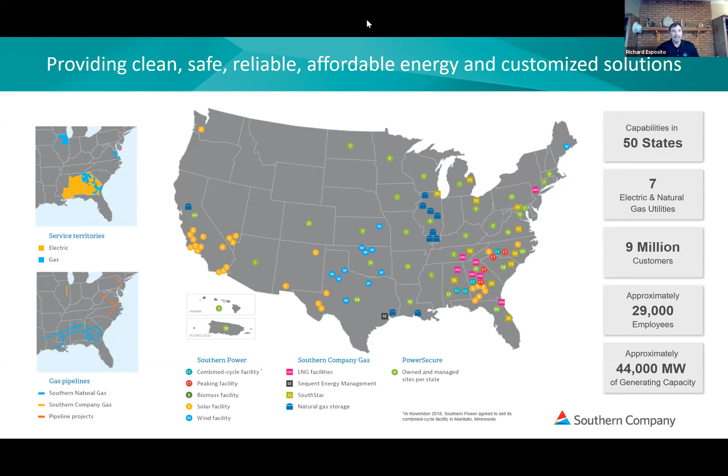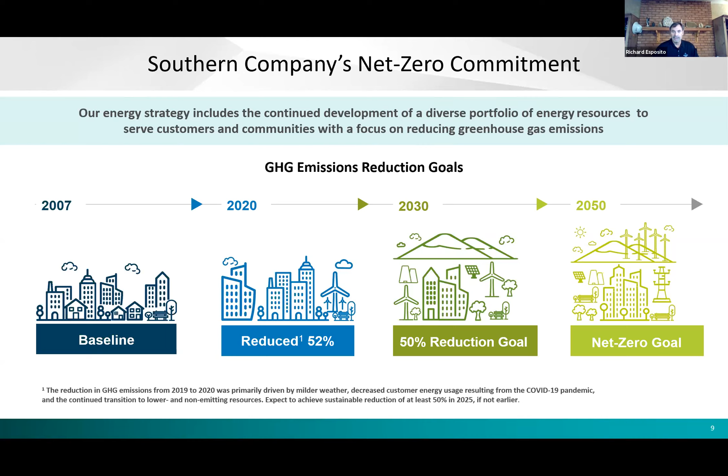We have greenhouse gas goals established, like most electrical utilities. We have net zero established for 2050, 50% reduction goals by 2030, which we've already actually met. But I will have to be honest and say we haven't really met that with a lot of technology. It's mostly been as a result of fuel switching from coal to natural gas. As we shut down coal plants and repower with natural gas, that's 65% less CO2 emissions. So we're really making some huge strides right now with fuel switching. But we do recognize that at some point we will have to start deploying technology on our fossil assets, and that's where CCS will come into play. Next slide.

So look, a few beliefs about the future. We do believe that CCUS is critical to our future, and we have to make it affordable to our customers. And also the interesting thing about CCS is it does blend well with other technologies like hydrogen. Emily talked about hydrogen and bioenergy CCS. So the infrastructure, the storage, infrastructure for transportation, all blends very well with that. So CCS kind of works across the board.

But we do recognize that it will be a very diverse portfolio of negative carbon emissions for us to meet those 2050 goals. We're very bullish on Class 6 UIC, nothing against enhanced oil recovery. We've just seen some issues with the NRG Parish Station facility with the price of oil and up at Boundary Dam. So we really are very, very interested in Class 6 UIC permitting.

And then again, the widespread deployment of CCS is going to take continued R&D investment, and that's why we're glad that we have our partners with the Department of Energy. It's going to take a lot of infrastructure. We've got the infrastructure bill sitting in DC right now, trying to figure out what's going to happen with that. But I think that's going to be very important. But it's also a three-leg stool of policy, technology, and permitting that'll all play a critical role in the technology moving forward. Next slide.

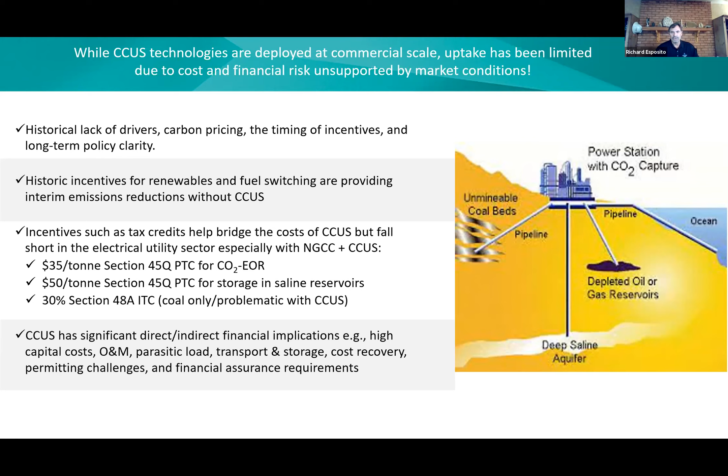So if you look at carbon capture technology challenges right now, if you're down in the range of purity of CO2 from a process or a power plant, you've got ammonia, natural gas, ethanol, which is relatively pure CO2 coming out. Most of what's going on there is you've got some dehydration, some compression, you've got to transport it, you've got to store it. So those processes, when it comes to carbon capture, are a little more straightforward. When you get into cement and steel, which is kind of that middle of the road CO2 concentrations and emissions, you start having some more difficulties.

But when you get into coal and gas, and especially with direct air capture, you're dealing with a lot smaller purities of CO2 in the flue gas or in the emissions. And so that's when the big costs start coming in, and then you have issues. In the industrial sector, there's heat integration issues. You've got multiple sources, like up at a petroleum refinery, you might have quite a bit of CO2 coming off, but it might be a bunch of multiple sources of different purities that you might have to deal with.

And then in the power generation, you have load following and dispatch issues with ramping up and down in the carbon capture equipment. And then of course, with natural gas, you've got the increased oxidative degradation with natural gas, as well as the higher O2 percentages, and then the lower concentration of CO2 in the flue gas for natural gas.

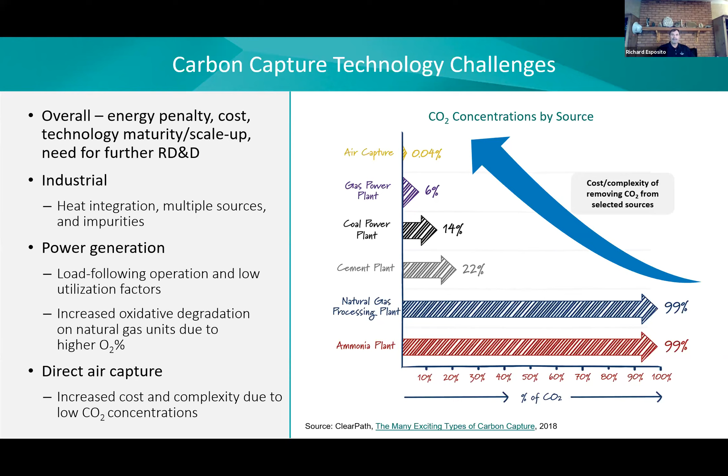Because keep in mind, in the electrical utility industry, we could choose to build nuclear, we could choose to do all renewables with energy storage, we could choose to do green hydrogen or blue hydrogen, and we could avoid CCS. But if we can get the costs down low enough, then it really makes it a very viable option moving forward. And I think one of the biggest importance here is this FOAK to NOAK to NOAK, the first of a kind, the next of a kind, the nth of a kind.

So beyond getting different technologies moving forward in this queue of technologies for diversity of technologies available, it's also moving them into the pilot, and then into the demonstration phase, and then next generation demonstration phase. So for example, Boundary Dam, when they did that project, they're saying that if they were to do this project at Shand, which is their other power plant up in Saskatchewan, they might realize 30 to 40% cost reductions, which is just really staggering, and that's amazing.

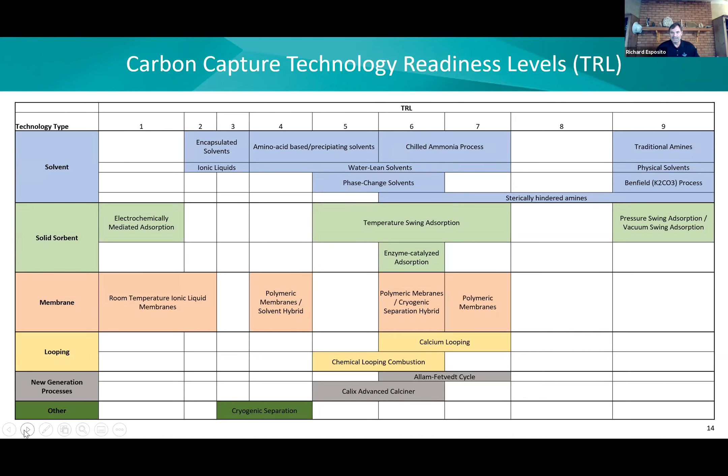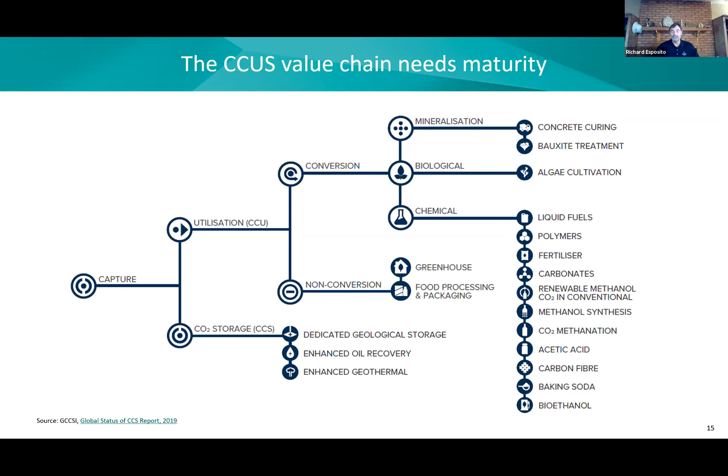Next slide, please. So also the value chain needs maturity. For large volumes of CO2, we're down there in that CO2 storage, dedicated geological storage, enhanced oil recovery. But Emily pointed out a lot of opportunities in the utilization part up there. And some of those are mature processes that have already been going on, but some of them are not. And so those things need to mature. And that's, I think, probably the essence of a lot of the utilization program that the Department of Energy has now and that a lot of industries are looking at. Next slide.

But the most important thing about this facility is that, for the most part, there's very little to no cost to the technology vendors who get accepted to come in there and operate and test their technologies. The Department of Energy is funding this, and then there's an industry cost share, and it's sort of this opportunity for people to come and to have their technologies screened by an independent, agnostic, third party who's looking at these technologies with a very open mind.

I mean, just because Southern Company operates this facility, we're not picking winning horses. All we're doing is helping technologies move, because any technology that moves forward that helps the industry as a whole is going to help us. Next slide.

And so we've had lots of hours of operations, lots of technologies tested. We've got an expert staff of capture engineers there, probably the largest grouping of people who know the most about carbon capture in the world. And also very exciting, we just recently built a natural gas boiler. So we're actually testing carbon capture technologies with real natural gas flue gas, instead of just diluting the flue gas that we were getting from the coal plant that was right next door.

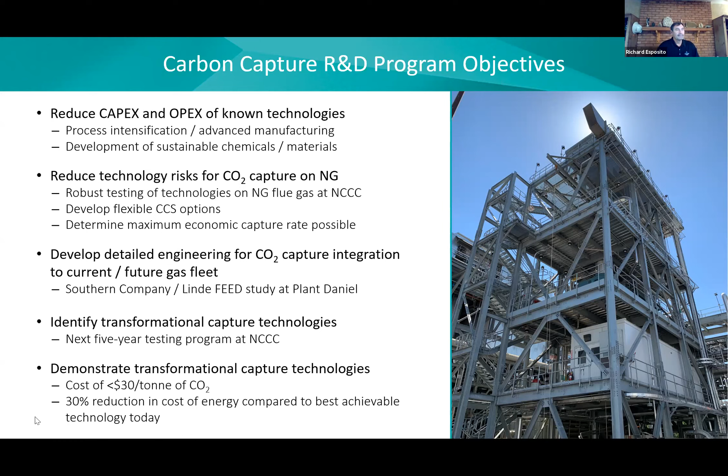And then we're also demonstrating and identifying transformational capture technologies, these up and coming technologies that haven't gotten a lot of attention in the past, like sorbents and membranes and zeolites, because a lot of people have really just focused on commercial deployment of the amines. Next slide. And of course, we've got absorption that we're looking at, adsorption, membranes, cryogenics is another very promising technology. And fundamentally, a lot of these technologies are very consistent both on coal and natural gas. Next slide.

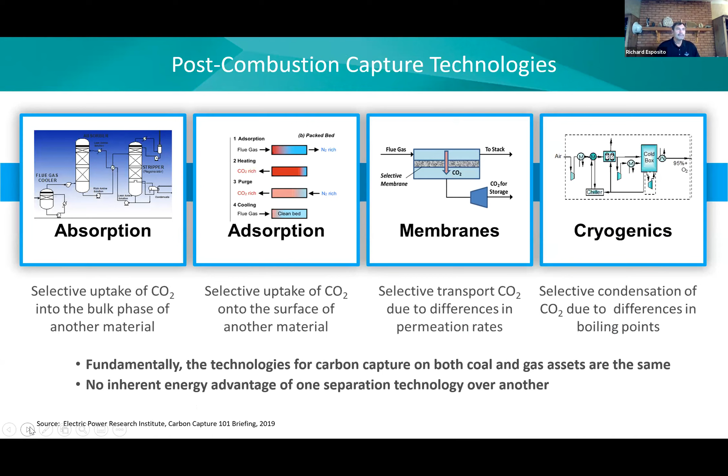So if you look at this, everything we've done to date, cooperatively with the Department of Energy or individually or the industry as a whole, everything we've done on coal is not for naught if we shut down all the coal plants or if we start saying, okay, we need to capture on natural gas. There's a lot of very common issues. I won't go through all these, but you can see this slide and the slides will be available. There's a lot of common issues between capturing CO2 on coal flue gas as opposed to natural gas.

But there are a few uniquenesses of natural gas. The lower CO2 concentration is the big deal, higher oxygen content and higher flue gas temperatures. So understanding those intricacies on deploying the existing technologies like amines and other things that are coming down the queue on natural gas is very important. Next slide.

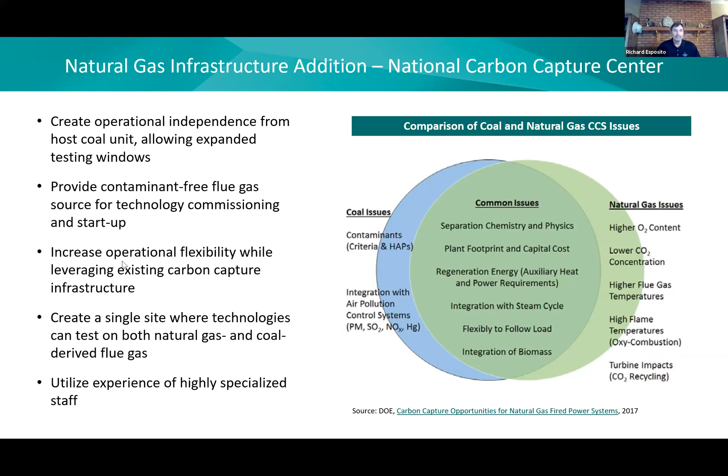And so the Department of Energy, again, I know I keep mentioning them, but they've got some great programs now. They've offered up some funding for FEED studies. And so Southern Company does have an award, and we're doing an effort where we're looking at a FEED study on capturing CO2 on natural gas.

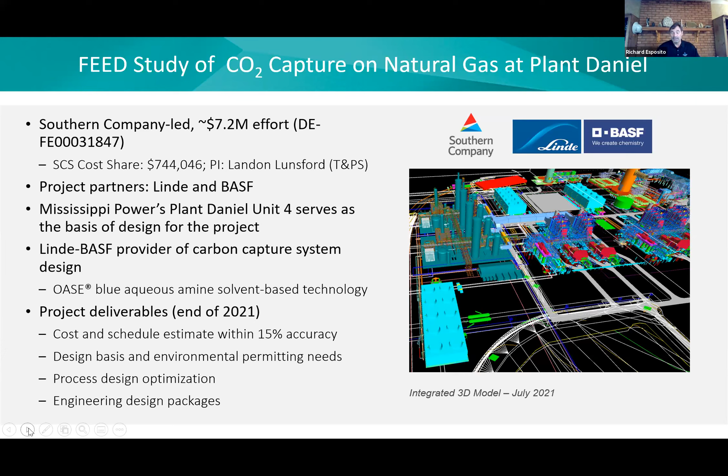And this is really important because what this is doing is taking technologies and basically evaluating what the capital cost would be. We're not doing O&M costs on this study, but looking at the capital cost of what it would cost to build carbon capture technology at this generation asset that we have in Mississippi, where we're doing this FEED study. And so this really informs our stakeholders for our RFP process and other processes on understanding the costs of carbon capture, especially in this case with natural gas. Next slide.

Infrastructure. The technology of building pipelines is there. Our good friends at Occidental Petroleum and Denbury would definitely agree with that. It's just the scale and the magnitude, and also where do we build these pipelines and how big will they be? And understanding source sink matching is really important.

And then thinking into the future about the hydrogen, the 111, that Emily mentioned. Talking about where would we build these pipelines? How is it going to further develop a network of CCS, both for the industry as a whole, but for other industries that might decide to decarbonize later on. Next slide.

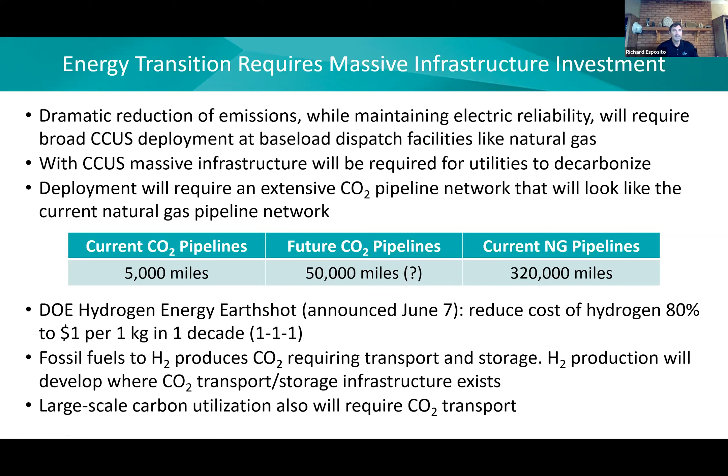And I know you guys are going to be talking about this a lot, so I'm not going to go into this, but there are pipeline issues with cost, property rights, and permitting, and there are some things in DC right now that are looking to try and streamline that. But the key thing here that I think everyone needs to realize is that when you start getting CO2 pipelines that are more than about 150 miles for source-sink matching related to storing CO2, you're getting into costs that are going to be paralleling some carbon capture costs for maybe a 700 megawatt gas-fired power plant.

And so that's tough on the shoulders of CCS, to be paying the capital costs of building a carbon capture plant and these large, long CO2 pipelines. And then again, the storage cost is probably pretty small compared to that, but it's a big deal. Next slide.

So Southern Company, I'm just really proud to announce that we've done so much site characterization. If you look at the slide on the left, we've drilled close to 20 wells across our system. We've injected CO2. We've built small pilot carbon capture plants. We pulled together a Class 5 UIC permit back when Class 5 was available. Now we're working on a Class 6 permit in our CarbonSAFE project. So we are surrounding ourselves with these issues, and we're really delving into this, especially the issue of source-sink matching. Next slide.

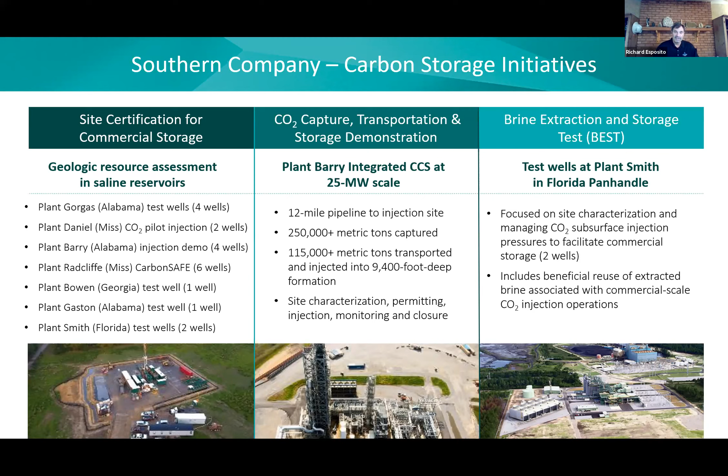And so on the storage side, I just really feel very confident about the storage technology. Understanding geomechanics and induced seismicity is still something I think we need to grapple with a little bit. I think we can always improve advanced reservoir modeling techniques; there's room for that. Monitoring, we have all the tools we need now to monitor CO2 in the ground. I would love to see some silver bullets come forward that really cross the T and dot the I on that. And then pressure maintenance and remediation: how do you manage sites where maybe you're getting some pressure buildup? I think those are some of the technical issues that are still outstanding.

But the whole process of just injecting CO2 into the ground and storing it long term, I think we're pretty much there on that. But early site certification is real important. It's been real important to Southern Company. These are a couple pictures of some of the sites where we've been drilling in our CarbonSAFE program. We've drilled 6 wells through phase 2 and phase 3.

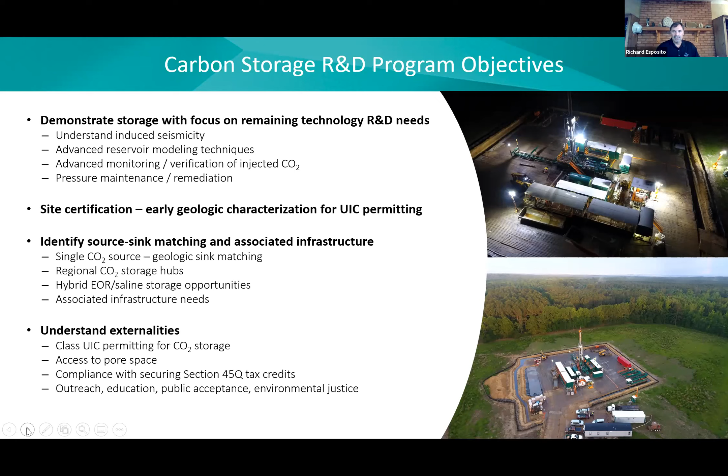But understanding whether we would do one-off source-sink matching and what kind of infrastructure is needed for that, or whether we'd be doing trunk pipelines and pooling multiple sources, those are the sort of things that we really need to be thinking about. And then all the externalities, which I know you guys are going to be talking about over the next couple of days: Class 6 permitting and primacy, access to pore space, and whether amalgamation is the way to go there, securing the 45Q tax credit, and then outreach and public acceptance, and now environmental justice is a big thing that we're definitely looking at. Next slide, and I'm almost done here.

So even as much source-sink, I'd be remiss as a geologist not to put a fancy map up on the screen. Even with all the wells that we've drilled in the Southeast and all the oil and gas wells that are in the Southeast, we still find ourselves in a situation where we understand a certain amount of our service territory where we could pretty positively do carbon storage. And then there are these areas where it would be impossible.

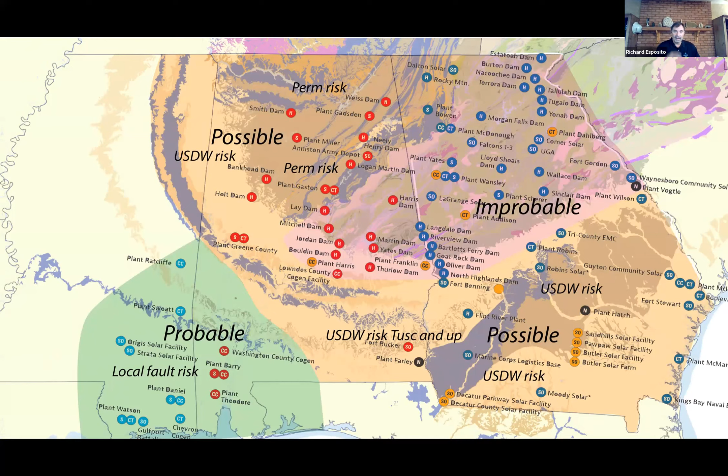That improbable area is the igneous and metamorphic rocks of the Piedmont, where there are igneous and metamorphic rocks at the surface and at depth, and you just can't do it there. So any power plants that we would have there, we'd have to pipeline it north or south. And then we're infill drilling and actually doing drilling on our own dime at Southern Company, looking at these areas where it's possible to do storage, but there's not a lot of information, in South Georgia or in North Central Alabama. Next slide.

And last slide, I don't have 2021, but the budgets have been really good. And I was excited to hear Emily say that the budgets next year are going to be even bigger. We'll hold her to that. But I think all in all, things are going well with DOE and their funding levels. We always want more funding, and we hope that phase 4 CarbonSAFE comes through, and there's lots of opportunities there. And with that, I am done. I think that's my last slide.

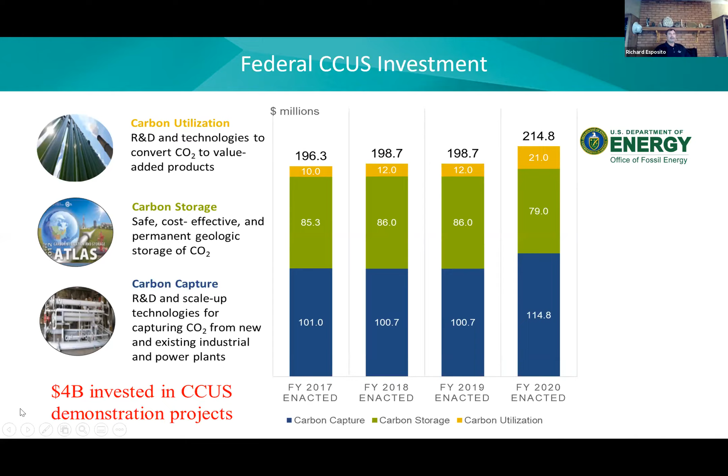Great, yeah. Thank you so much. This was a really great overview, and really appreciate walking through the technology and where we're at right now. We do have a few questions in the chat, so I'll get to them. One of them was, you mentioned the transportation pipeline issue, and I think your cost on one of the slides might have just represented capture. So how much more would transportation and sequestration mean in terms of cost? And then how does scale affect costs? And would you say that the economics suggest maybe aggregating multiple CO2 sources?

Yeah, there's obviously a benefit on economy of scale in building pipelines. I'm not a pipeline expert, but if you ask our good friends Occidental Petroleum and Denbury, they would say the major cost is the land and building the pipeline. The diameter is an additional cost, but it's not a significant additional cost. So a strategic vision is so important here, and that's so difficult in the electrical utility industry. What plants are going to be operating 5, 10, 15, 20, 25 years from now? Is that coal plant going to be shut down? Is that older natural gas plant going to be shut down?

So a strategic vision in generation planning and understanding what assets are going to be running and when we need to decarbonize those assets to reach our goals is so difficult. And we go through all these scenarios. And so I would say I'm real positive on regional storage hubs and pooling CO2 together from multiple sources, but you just have to be very guardedly optimistic that when you plan that all out and you spend the money for those pipelines, that those sources are really sources in the future, right?

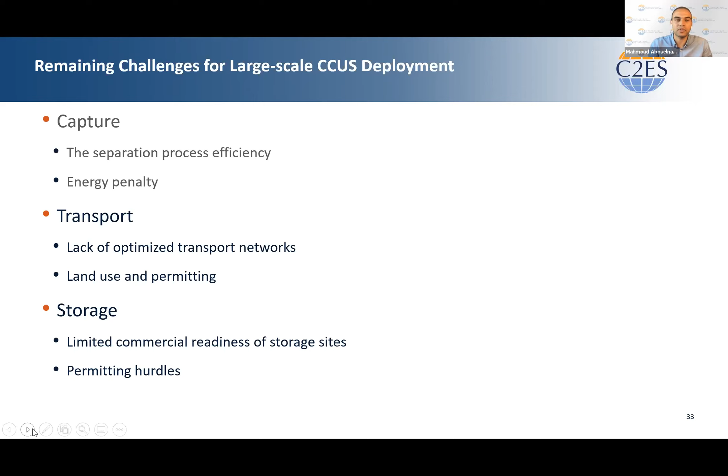Since industrial and power facilities tend to be concentrated in the same regions, these industrial hubs offer an opportunity for commercial synergies and economies of scale. And that's why investing in larger scale trunk pipelines can substantially reduce the overall cost by transporting large volumes of carbon dioxide from different emitting facilities to designated geological storage sites.

This research project estimated that more than 350 million tons of carbon dioxide can potentially be captured and stored each year by scaling and optimizing this regional infrastructure. This number, the 350 million tons, is actually more than a 15-fold increase in the current carbon capture rate that we have in the United States. So that gives you an idea how this kind of optimization can be a game changer for CCUS.

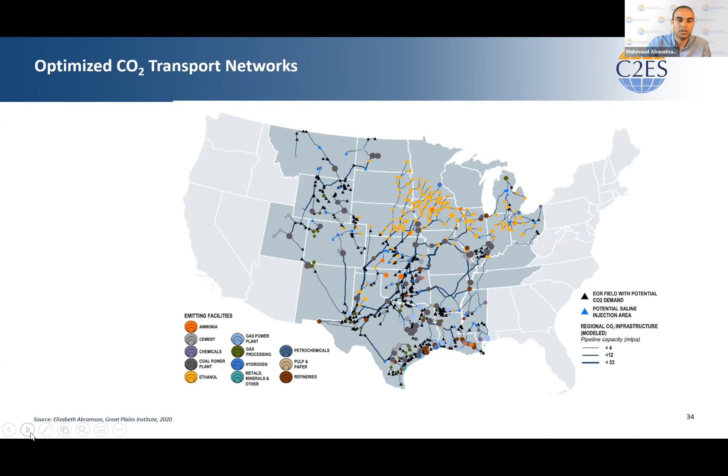These shared networks we are talking about take us to what is known as the hubs and cluster model. The concept basically separates capture from transport and storage infrastructure, and this allows some kind of risk sharing among different public and private organizations. And we have seen examples of this model. Actually, one of the projects that follows that model is in the center here.

For this project, the location is actually a big advantage because it's in the largest industrial region in the UK, which provides value by integrating the potential for both a decarbonized industrial hub and a hydrogen economy, which is an emerging economy that we have been talking about for some years now. And for sure, that brings us back to the idea of sector coupling. That's a big theme for decarbonization going forward.

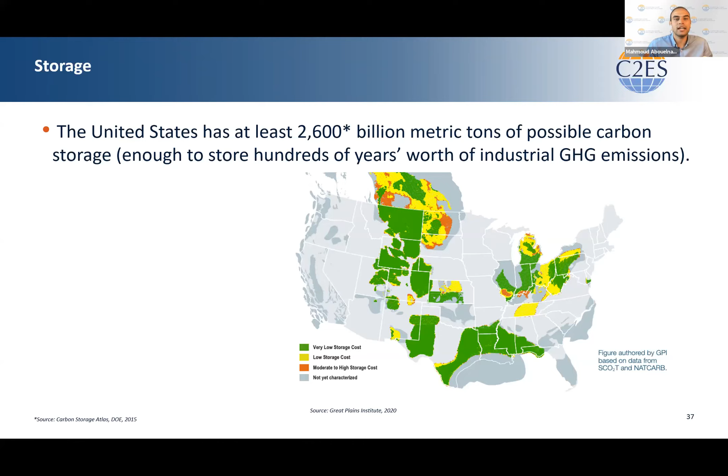Next slide, please. I just wanted to highlight the example of this particular project, the Illinois Basin Decatur project. It took approximately 4.5 years to receive a Class 1 permit, and then they needed to apply for a re-permit to make it Class 6 when the new category was introduced, and it has been the first well completely authorized under the Class 6 program from the EPA. And this process took nearly 5.5 years to complete before injection could even begin.

So that gives you an idea about how the current framework can jeopardize the timeline of any large-scale project, and that's something that we need to work on to allow more project developers to put in some of these large investments.

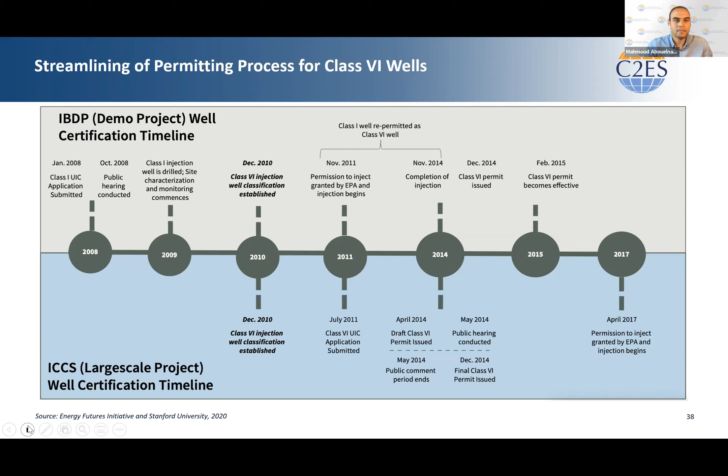Last slide, please. Finally, I want to highlight that CCUS technologies have a dual role in climate change mitigation. First and foremost, they can reduce emissions from energy-intensive industries and power generation. And second, they can be used for carbon removal from the atmosphere. While the capture part is different in emission reductions compared to removal, the transport and the storage parts are actually the same, which is why scaling this kind of infrastructure is essential for the development of carbon dioxide removal technologies.

As many of you may know, the recent assessment report of the IPCC has underscored the urgency to expand the use of carbon sinks to avoid the most drastic consequences of climate change. All mitigation pathways in that report use CDR technology to a certain extent, depending on how ambitious the scenario is. And you can see from the graph here the potential role of CCUS technologies in these different scenarios to both reduce emissions and remove carbon.

The National Academy of Sciences has reached the same conclusion, that 10 gigatons of CO2 need to be removed globally each year through 2050, and 20 gigatons each year need to be removed from 2050 till the end of the century. And that is why building a carbon infrastructure now is essential to allow time for this technology to scale up and reach the capture and removal levels that we need to achieve decarbonization by mid-century.

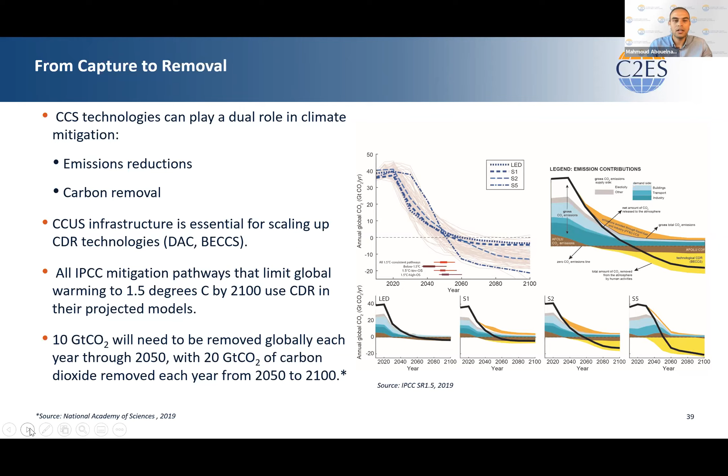Thanks so much. I'm Erin Burns, the Executive Director of Carbon180. Carbon180 is a climate NGO focused entirely on carbon removal, so really fantastic transition. I will talk mostly about direct air capture, the technological pathway. I want to share a little bit about what it is, where we are today, where we need to be, though Mahmoud covered that as well, and how we'll get there, as well as a few opportunities along the way. So I have a lot of slides as a heads up, but I'll be quick with them. They're mostly pictures.

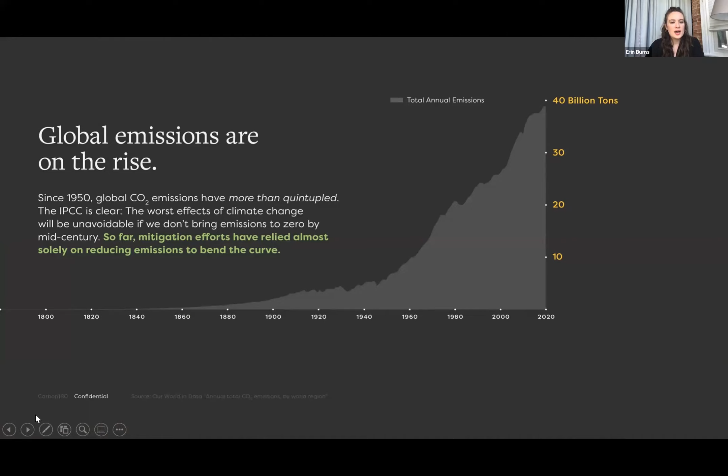Mahmoud covered much of this, but just as a note, we all know global emissions are on the rise. We need to stop emitting, but really that's not enough. Next slide. We need to also go negative, and we need to go really, really negative, and sooner than folks think. So we need to be talking about removing tens of billions of tons from the atmosphere, and we need to start doing that now.

Next slide. Luckily, we have lots of options to do that. There are natural pathways around soils and forests, and then more technological pathways, in particular direct air capture and bioenergy with CCS. We use the term carbon tech to talk about utilization outside of enhanced oil recovery. We don't really work on enhanced oil recovery. And so carbon tech is that captured CO2 to products piece.

Next slide. So where are we today with carbon removal? There's a ton of removal potential across solutions. And one of the really exciting things about direct air capture and bioenergy with CCS, the technological pathways, is that they can really, really scale. So if we're talking about 10 gigatons per year, they're going to play a really big role. But right now, next slide.

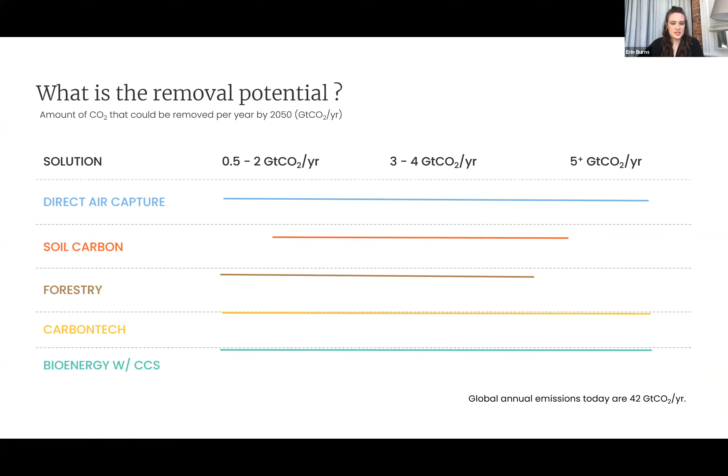I'm sorry, next slide. Oh, there we go.

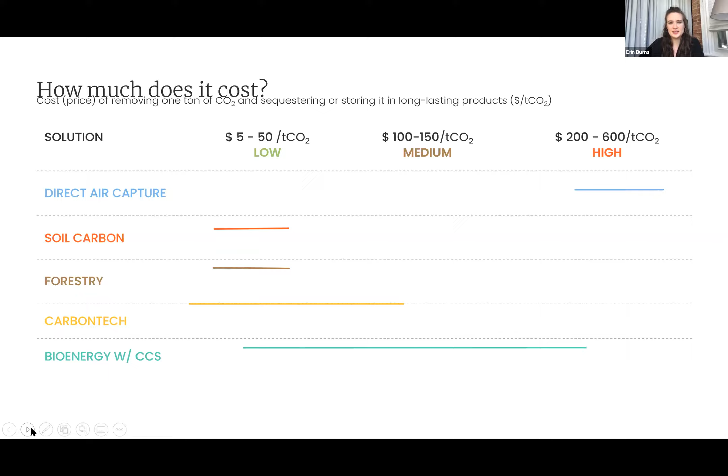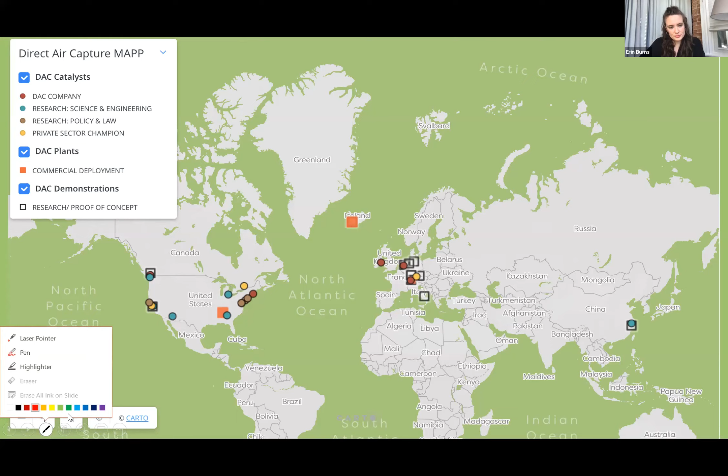But, oh, actually, well, we can skip to this one. It's fine. Oh, sorry.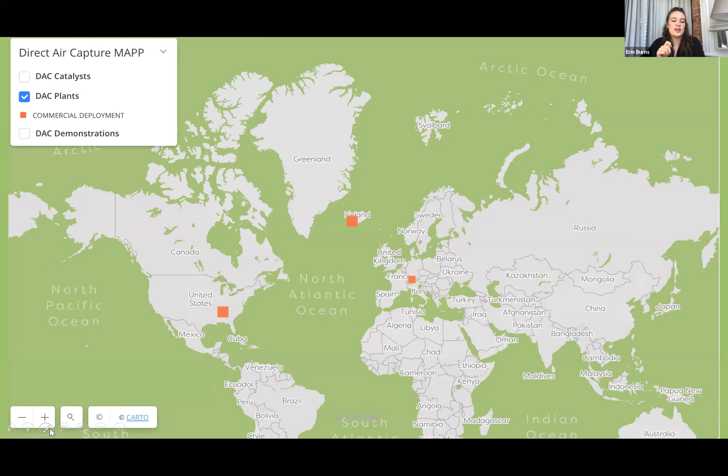But if you look at just actual direct air capture deployment, and commercial direct air capture deployment in particular, not including demonstrations, you'll see that that number really drops pretty rapidly. And next slide. But recently the largest direct air capture plant was launched in Iceland just this past month, the Orca plant from Climeworks, which also has a facility in Zurich, so is responsible for most of the commercial deployment right now.

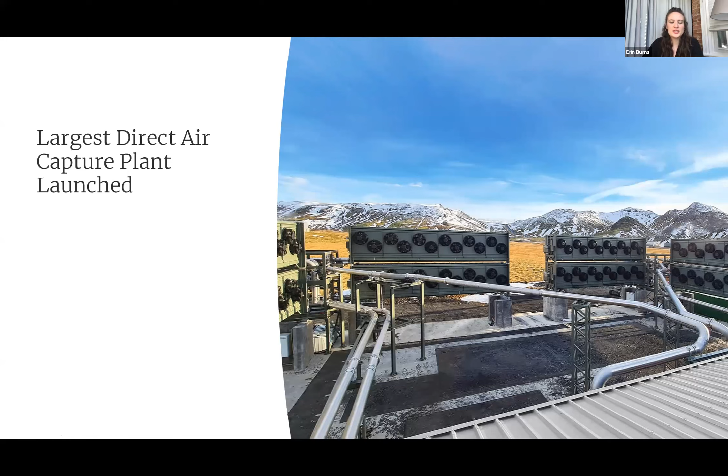This is perfect. You can stay on this slide. I will mention that there is a 1 million ton per year planned plant in West Texas as well, which would obviously represent a couple of orders of magnitude increase in the size of commercial direct air capture plants. So where do we need to go?

Perfect. I just want to pull this back up again to reiterate: the Orca plant that I mentioned is our largest DAC to storage plant, but is only about 4,000 tons per year. So that's a really big accomplishment for the technology. But what we're talking about, again, is really billions of tons in the next couple of decades.

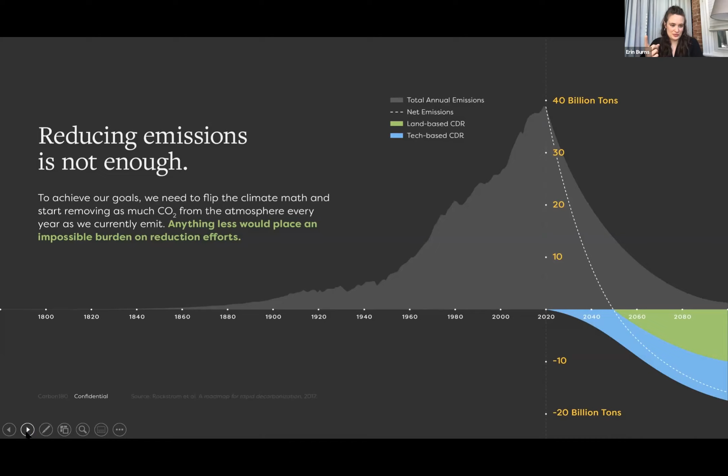And one quick note, next slide, sorry. You heard Mahmoud also bring up the 10 gigatons piece. To go more in depth on the specific applications and the trade-offs and benefits that come with different carbon removal solutions, I definitely recommend something called the Road to 10 Gigatons. It's a very simple game online that really, I think, helps folks get introduced to the specific carbon removal pathways.

Perfect. So how do we get there? One of the most exciting things happening right now in carbon removal, sorry, next slide, is that we have big companies like Stripe, Shopify, and Microsoft who are purchasing carbon removal. So this is very different from where we've seen low quality, inexpensive corporate offsets.

But instead, if you look at many of the materials, for example, that Stripe has published around purchasing direct air capture and other forms of carbon removal, you'll see that they're really interested in very high quality carbon removal that's very verifiable, and that they're very comfortable purchasing expensive carbon removal because they see the same graphs that we see where we really need to scale up this industry. And so they're looking to invest in this. And this has been a huge catalyst for the carbon removal marketplace.

Next slide. But when we're talking about billions of tons per year, companies are not going to get us there, and we need a lot of policy. Luckily, there is a lot happening. Most of this is at the federal level, but there are several state things like the low carbon fuel standard in California, some carbon tax procurement efforts in states like New York, California, Hawaii. But there are also major federal policies that are moving forward. The one that I will point out is there's $3.5 billion for regional direct air capture hubs.

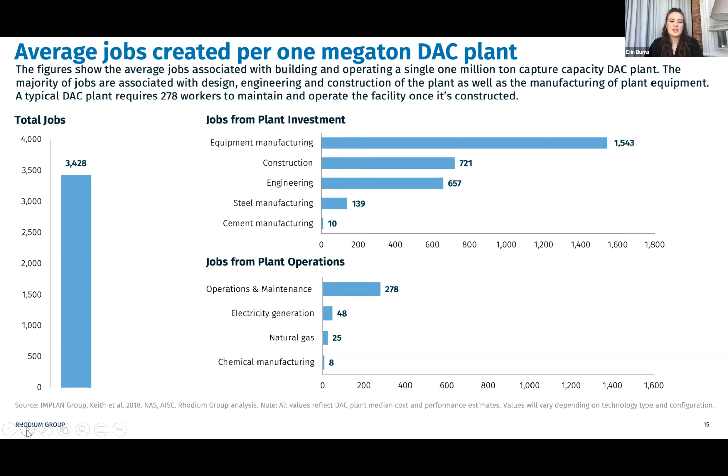So if we're talking about pulling billions of tons of carbon from the atmosphere, we're also talking about hundreds of thousands of jobs. This is for a 1 megaton plant, but if we're scaling up in line with climate goals, we're going to see hundreds of thousands of these jobs. And these jobs are not just at direct air capture plants, but across other industries. For example, if you're building a direct air capture plant, you also need a lot of steel, so you're talking about steel jobs and so on. This is pulled from the Rhodium Group, which did a really fantastic report about a year ago that I would highly recommend. Next slide.

And then finally, around carbon tech, I talked a little bit about the opportunities around utilization. In 2018, we did a market sizing report around carbon tech, the captured CO2 to products piece, and found in the US alone a $1 trillion total available market across building materials, fuels, plastics, chemicals. This represents an opportunity to create a market for captured CO2, which is especially important for direct air capture applications.

In a carbon capture plant, you are producing a product: electricity, steel or cement. But in a direct air capture facility, it's important to recognize that this is just a public good. If you are able to sell that captured carbon dioxide, it's going to help offset the cost of the direct air capture plant. It's also going to help decarbonize these other sectors.

So there are opportunities in building materials; we have a report on that I'm happy to share. There are opportunities around jet fuels and things like that. So a big opportunity, and almost $6 trillion globally.

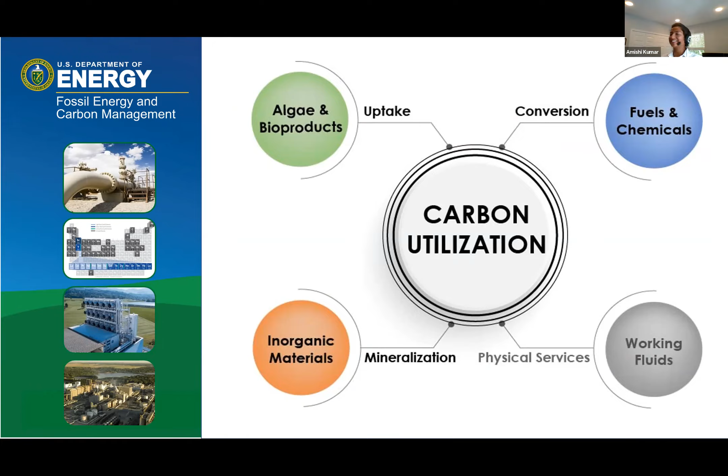All right, I'm definitely done now. Thank you, Eddie. Thank you, Amishi. Appreciate your information and insight. So we do have a question from the chat box.

With the current and projected cost of direct air capture, why not invest that capital in capturing existing or legacy emissions? Yeah, thanks so much for that question. So I'll say for us, we don't work on point source carbon capture, but I spent a lot of time in my previous jobs working on this. And I don't think it is an either or. I think you really need to invest in both. And first of all, as my fellow panelists have pointed out, there are shared R&D opportunities.

When you're talking about the actual CO2 capture, there are some differences in the technology, but there are some overlapping R&D needs. There's also a lot of shared infrastructure. So what you do with captured CO2 typically doesn't really matter what the source of it is, if it's direct air capture or point source CO2.

So that utilization piece, things around storage. Direct air capture has a lot of flexibility in where it can be located, but even if it can be located anywhere, there are still transportation needs associated with that. So things like shared infrastructure.

And then I think the other thing I'll say is that we talk a lot in the CCS world about the places where you need CCS to decarbonize, where it's really expensive, or the technical feasibility of decarbonizing certain industrial applications is just really difficult right now, if not outright impossible or too expensive.

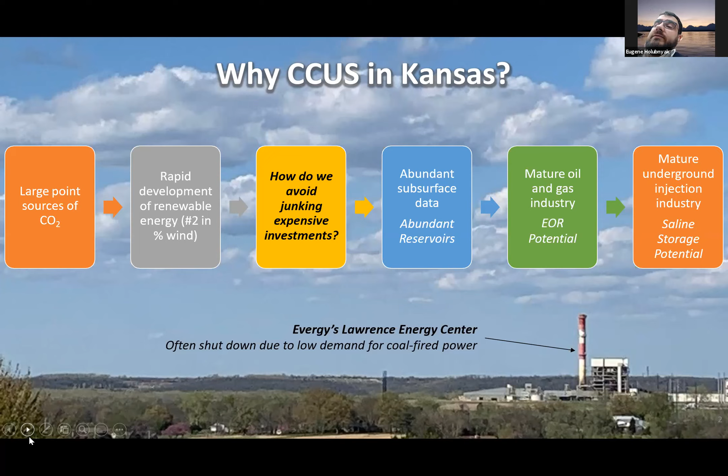So if we move to the next slide, we characterized those resources not only from a geological standpoint but from an engineering one as well. We connected with a number of coal-fired power plants, but also with ethanol plants and other CO2 generating facilities like fertilizer plants and refineries. There's a scale of complexities for each facility, with the easiest being ethanol plants, and the hardest probably things like cement and steel producing facilities. They all will need carbon capture on them.

And so there's a question: what do we need in order to move projects forward? One of the things that we need is infrastructure. And infrastructure means not only CO2 storage facilities and capture facilities, but also connecting the dots, because a lot of times sources and sinks, unfortunately, do not coincide. You can have a power plant sitting in unfavorable geologic conditions, so you cannot make a storage facility next to this plant. And so what do you do?

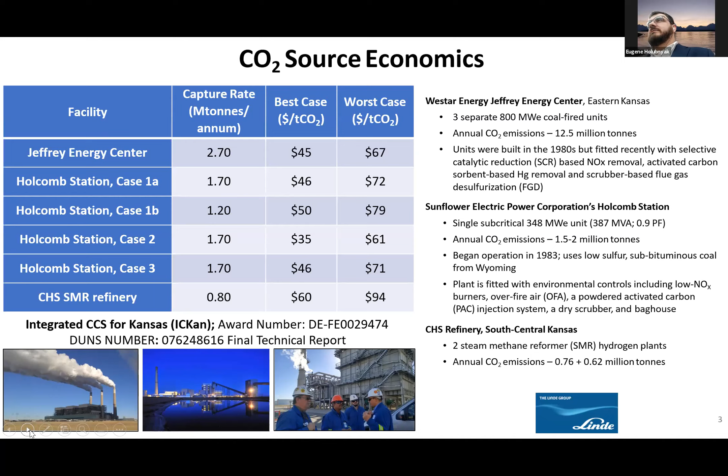More of that is needed. The next question is permitting. And so UIC Class 6 permit is complex. It has multiple caveats to this process. And as one of the individuals who went through the process, I can tell you kind of insider information about this, is that it takes a long time because it has multiple kind of chains of command within the EPA.

And so your information that you provide to the agency is bouncing through different specialists, through consulting agencies, and so on and so forth. And simplifying this process and also providing EPA with necessary resources is probably required to move projects forward. Because from the investor's standpoint, this is a big risk and a big unknown. If the project cannot move forward in, let's say, 1, 2, 3 years, the investment could be off the table.

Multiple companies, and I'm not going to name names, but working with advising multiple commercial projects right now, are struggling with investors because of this unknown variable, which is the length of the permitting process. And so if you can make sure that you have a decision after a certain point, and if you can shorten this decision period, you can make sure that the investors are actually willing to invest in those projects going forward.

And then there's another big question, and it's also about legislation and regulatory framework, and it has to do with pore space issues and liability issues. In some states we do, in some states we don't. In Kansas, there is some ambiguity about who owns the pore space, and can you actually condemn the pore space to make the large scale project?

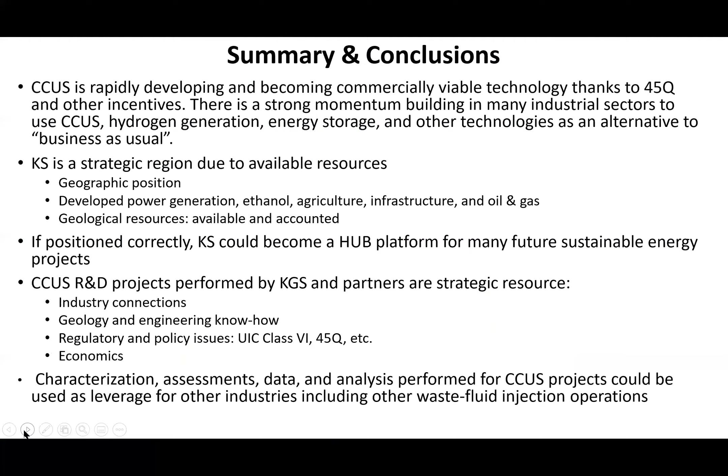Thank you. Thank you for the invitation to speak today a little bit from the perspective of Project Tundra. There's a short video that kind of sets the table as to what is Project Tundra and its significance to Minnkota.

Not sure that there's any audio coming through, and if we can't get the audio to work, the slides I have can kind of set the stage for that as well. Give us 1 second, Shannon, to potentially work out the audio issue. I can hear the audio on my end, so maybe we should just drop the link in the chat, and if you all want to check it out after, we can move forward with Shannon's presentation. I'll try one more time.

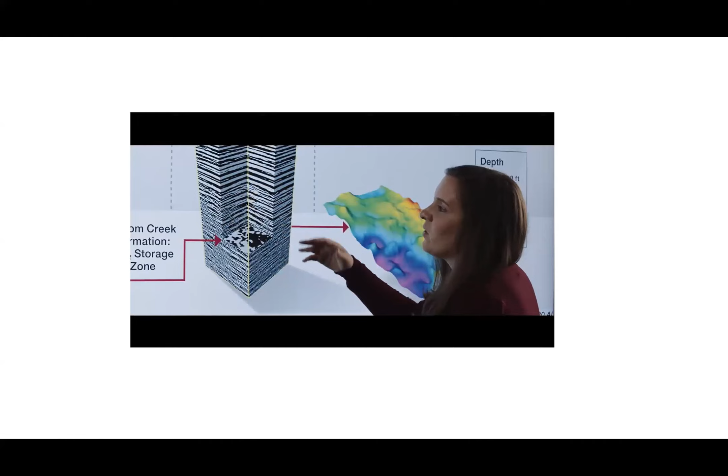Once the capture equipment is installed, CO2 will be captured at a rate of roughly 4 million tons per year. That CO2 is compressed and then transported by a short pipeline to injection wells that will push the CO2 into formations, geologic formations, in the order of 5,000 feet down to as deep as 10,000 feet below the surface. At those depths, there are various geologic formations or horizons that are prime targets for taking the CO2 and storing

it safely and permanently. You need these porous sandstones that act like a sponge and suck in the CO2. But not only that, you need these unporous or the impermeable caps and basement rocks above and below these porous materials that will lock the CO2 in place. Milton Young sits right on top of a great interval of these types of rocks.

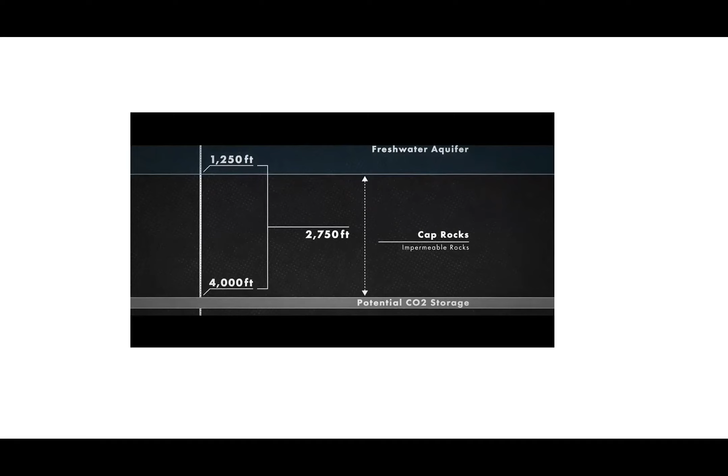Groundwater in and around the center comes from less than 1,000 feet down. Storage of CO2 in that area will take place at depths around 5,000 feet up to 10,000 feet. Between that aquifer that people are using their water from and the shallowest target that we're going to put CO2 is thousands of feet of rock in there that's very good for keeping CO2 in place. So the risks are very negligible with respect to any impacts to the groundwater.

We are at a very exciting time. We're right at the cusp, right at the precipice of an explosion in the concept of carbon capture. There is no way for the world to meet the goals that the IPCC has set for CO2 concentrations without carbon capture. You can add a substantial amount of renewables to the grid, and we are, and in the US, you'll see that number climbing. In our region, you'll see it climbing.

In Minnkota's case, we have a substantial amount of renewables in our portfolio already. We need to have resources at our disposal to keep that grid reliable. Coal is a part of that strategy. We also have to have other energy resources at our disposal, and it all has to work together. The countries around the world that are just now industrializing, it's going to be important to raise them out of poverty, to give them access to low-cost, reliable power. And fossil fuels are by far the best way to get that done.

The problem that people find with fossil fuels is carbon emissions. And we have the technology with carbon capture. Let's use our brains, let's use our technology to solve the problem. And everybody wants to leave the world in a better place than what we inherited. And these are the types of projects that enable us to do that. Because you know there's a real purpose for what you're doing and why you're doing it. And at the end, say to my kids, my friends, and neighbors, I was part of that.

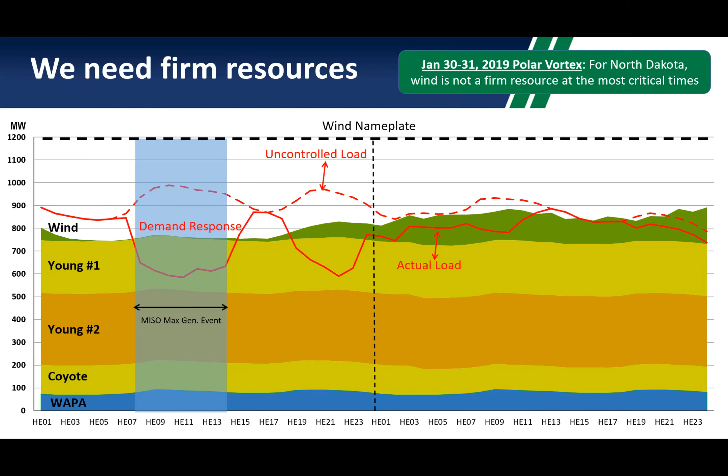So the flue gas enters the quencher, which brings it down in temp. Then you have the absorber where the amine solvent dredges our flue gas. And that CO2 rich solvent then enters into a regenerator where it's heated using the steam from the natural gas boilers, and the CO2 then pops out of the amine solvent in a 99.9% pure CO2 stream. It then enters into a compressor, which compresses it to about 1700 PSI.

One of the hurdles that Eugene mentioned is, you've got to hit the jackpot in geology if you're a source close by, or we need to find ways to consolidate and transport. Luckily, Minnkota did hit the geologic jackpot. We only require a quarter-mile pipeline from the Milton R. Young station to the injection sites, which sit just south of our Milton R. Young station within our fence line.

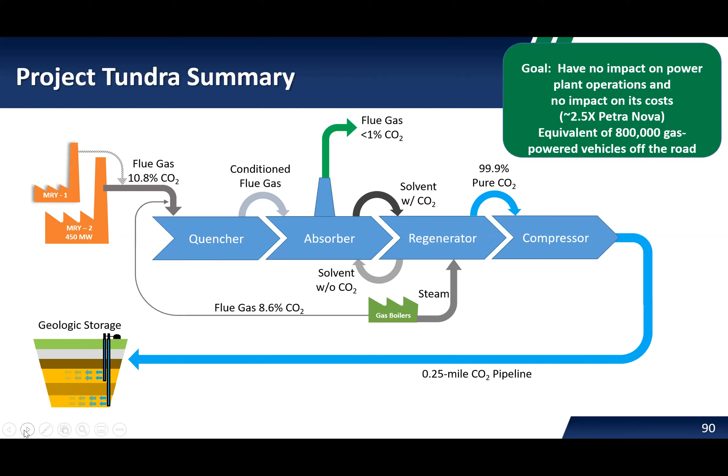So where we are in our carbon capture development: the front-end engineering and design study was completed in June of 2021. We're now focusing on cost estimates and construction execution plan and schedule, so really finalizing that FEED design and engineering. Permitting is currently in progress for our air permits. Water appropriation has already been secured, and our discharge permits are in application, as well as our waste permits.

We're in the process of transitioning into an EPC phase of the project, where we'll do final detailed engineering and design, and enter into contract negotiations with the technology provider and any contractors that we might have on site.

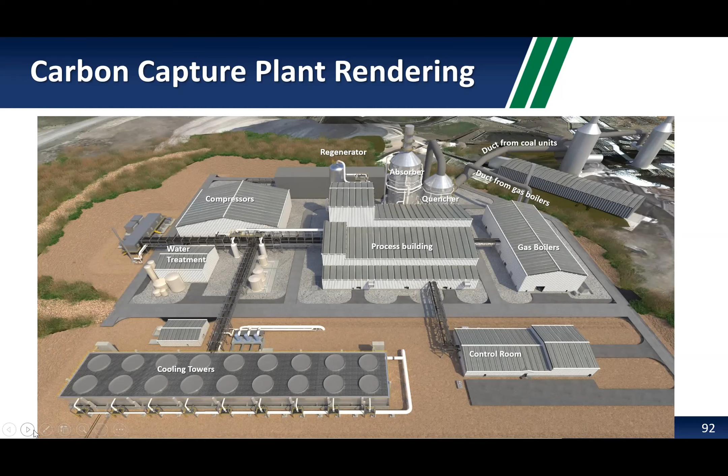From a scale standpoint, the carbon capture system sits on the same size acreage as our current Milton R. Young station. So it's essentially doubling the size of the footprint. So that just kind of presents the scale and the timeline of construction. It's quite significant. You can advance to the next slide.

On the geologic storage side, that map on this slide here shows our storage facility areas that we're currently under permit review for.

And it shows the area of review for both the Deadwood and the Broom Creek, which are 2 formations. So quite a significant amount of characterization goes into developing one of these Class 6 permits, as Eugene mentioned. That's a huge hurdle from an economic standpoint for a lot of projects. We were lucky to be able to have some funding from the state of North Dakota, as well as through the CarbonSAFE program, to drill and benefit from the data that was collected from the drilling of 3 stratigraphic test wells in and around the area.

We performed 2 3D seismic surveys over this area, performed 1 injection test on one of the stratigraphic test wells. We also benefited from some CarbonSAFE funding and, again, NDIC funds going towards the modeling, build out, and the simulations that we ran for the operation. We are fortunate, again, the geology ended up turning out far better than even was anticipated by the geologists at the EERC. And we're able to reduce the size of the project from a 2-site to a 1-site injection operation.

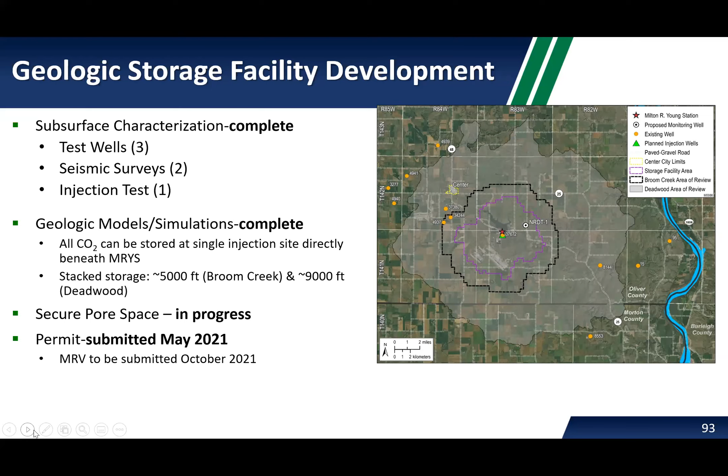And then our permits for storage, our Class 6 and our storage facility permits, as well as drilling permits, were submitted back in May of 2021. Our MRV is finalized, and we are getting geared up to actually file that soon and get it in queue. Okay, you can advance to the next slide. This is really my last slide that I have. It's just kind of a current status of where our schedule is and what are our next steps.

So I think the key factors are we're looking at entering into an FID decision starting early next year, having a finalized EPC in late 2022. And because of the size and scale and the weather up here in North Dakota, it's something less than a 4-year construction timeline, but we're looking at about at least 3 years of construction. So yeah, I'm happy to answer any questions about hurdles or barriers.

Great, thank you so much, Shannon. That was very interesting, and Eugene's as well. And I invite people again to enter questions into the chat and into the Q&A.

We'll start with one of the Q&As, which is, what financial mechanisms are most helpful for commencing these projects, getting them off the ground? There are tax incentives, there are loans, there are credit enhancements. We've heard about 45Q quite a few times. And how might these differ for different sort of actors? Shannon, you're with a cooperative utility, so you're a nonprofit, so tax measures may have a different flavor for you than for an IOU utility or an industrial entity.